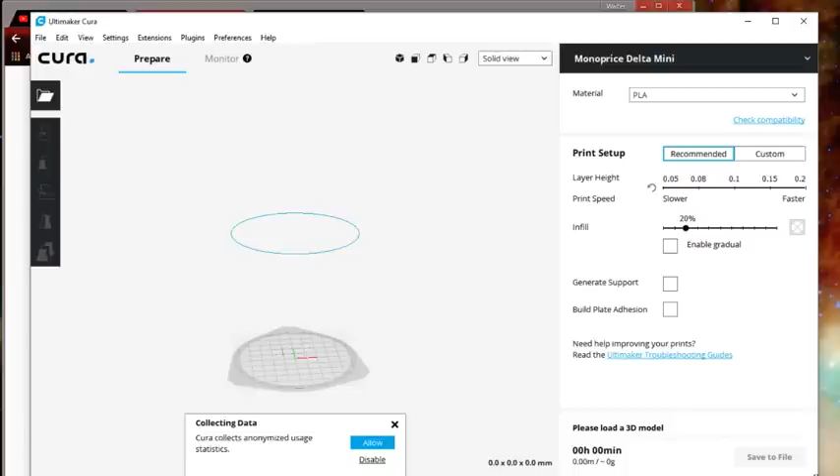Now I've already got the printer added, but I will show you how to add it. When you load their profiles or settings, you can go to settings, go to printer, add a printer, and then under other, for this printer, you would go down and select the Monoprice Delta Mini. It is not there when you first install Cura. The Select Mini and the Select Mini version 2 are both there. Only the Delta Mini is added for this list.

Alright, so now this is on their stock standard, what is this, 0.15 I think. So if I go to settings and custom, oh, it's got a 0.2 layer height. Hold on, let's choose the setting here.

Profile, fine 0.1. Alright, so if I hit that, and I discard everything else. Okay, so now we are on the Fine 0.1 profile. This is their stock profile.

Yeah, I know. You can see where it says Kuntry 3D? If you see something like that, or something you think I might want to see, tell me. Something I might want to read, or somebody's saying something to me, let me know. Because I'm paying attention to this, not that. Oh, you're doing the chat.

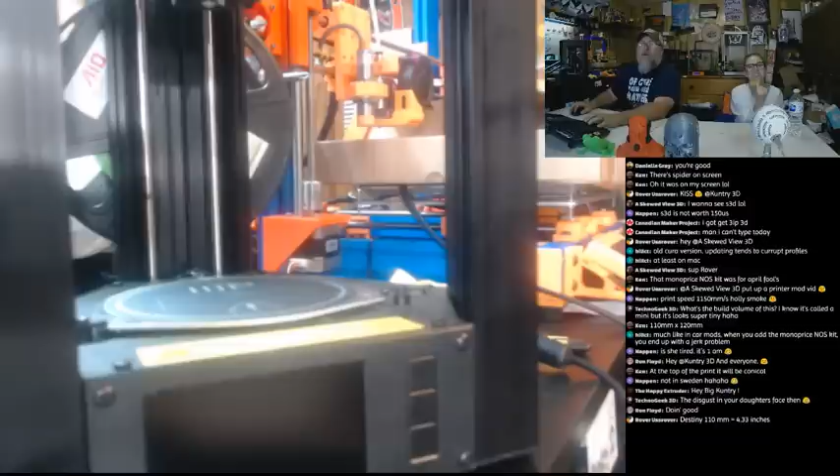So what we're going to do is I'm going to pop back into Cura, go to all. Oh no, that's not it, cancel, hold on. That probably did it right there. I don't have a clue, I can't tell what's going on here. Nope, that didn't do it. That's the wrong camera, why don't we do the right one? There it is, alright, I just got to remember what letter I used.

No fair, she has it. Not only that, it's a Krispy Kreme donut, I have a whole box of them. Pick it up, show them. We have enough to share, you want one, Mad Mike? We don't, I've eaten like a whole box. Oh let me see, all we got is chocolate, some chocolate left. These were from yesterday morning. I don't know, y'all can't see those. Hold on, I was so confused, I was like, they can see us right now. There you go, that's what's left of 2 dozen I bought yesterday morning. So yeah.

Uh-oh, alright, there we go. Okay.

Alright, Nappen, no, what you should do is see if the G code on file has a G92 command that lowers the bed height. Lowers the bed height, see, I don't know, I'm new to this as well. I'm glad some of y'all are here because we can look at it and see. But in order to do that, I need to take this little card out of this printer. What?

Okay, well, I agree. Yes, I do like Pepsi Cola, that's exactly right, I do. I thought it said peninsula. Penicillin? Peninsula, peninsula, okay. No, first it said Pensacola.

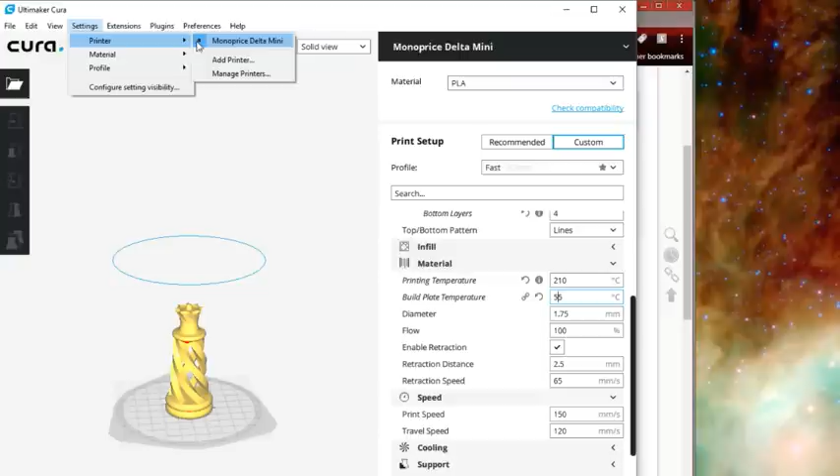Go to settings in Cura. So go to settings, printer. Or manage printers maybe? Or the profile. If I go here, I go to machine settings. Oh, you can set it here. I see, I see, so you don't have to do it in each file, you can do it here.

Yeah, I'm here, and there's a 20 or 30 second delay in chat, so I have to sit here and wait. I'm not trying to be silent, I'm waiting for the chat to pop up once you hear what I'm saying. Right now the Z is at 0.3, so if I wanted a little higher, I would go to 0.4 or 0.5, correct? And I got to wait for you to answer, which is going to take 10 or 15, 20 seconds.

Yes. It's ticking and not doing anything. That's annoying. It's actually close to right. That says 707 and it's 704 or whatever. Why is it ticking? There's no little hand. No, there's not. But the big hand moves every time it ticks. Okay.

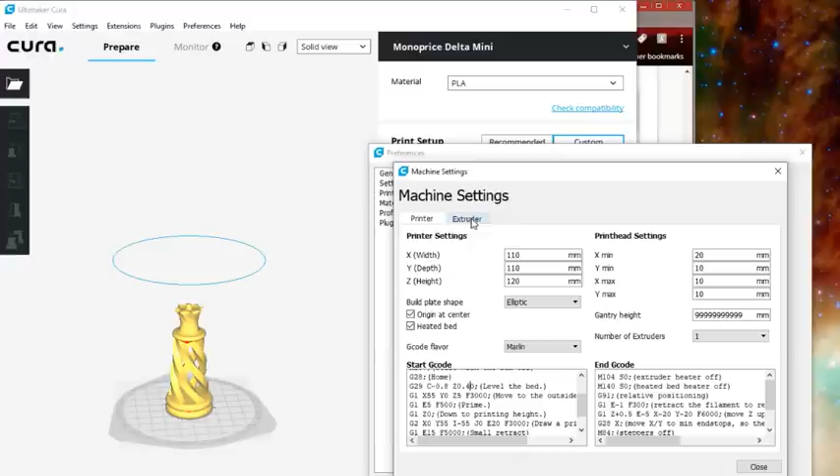Test 0.4 first. Okay, I'll do that then. Let's test 0.4, so let's put 0.4 on here. And we will save that. Alright, so we're good, and we hit close. So I don't have to touch that.

So now let's go down here to build plate adhesion. We have a skirt. And then we can go in here and say skirt line count and skirt distance. That's two things that I change in some others. So I want a skirt line count, and I want to extrude some filament, so I'm going to leave it at 4, and I'm going to make the distance at 4 millimeters as well.

That looks good to me. So we can actually save it to the removable drive. It's saving. It said it's saved. So I'm going to close this, and we're going to go over and rename it.

Rename. Oh, here, just double click. Let's go to the F drive.

I have also found that it likes the .g. Yeah, I left the infill at 20%. I'm just going to leave that, that's fine. I could set the layer height to 0.3, but I think I'm going to stick with 0.2 for right now, because we are just trying to make it as fast as possible. So I'm going to eject.

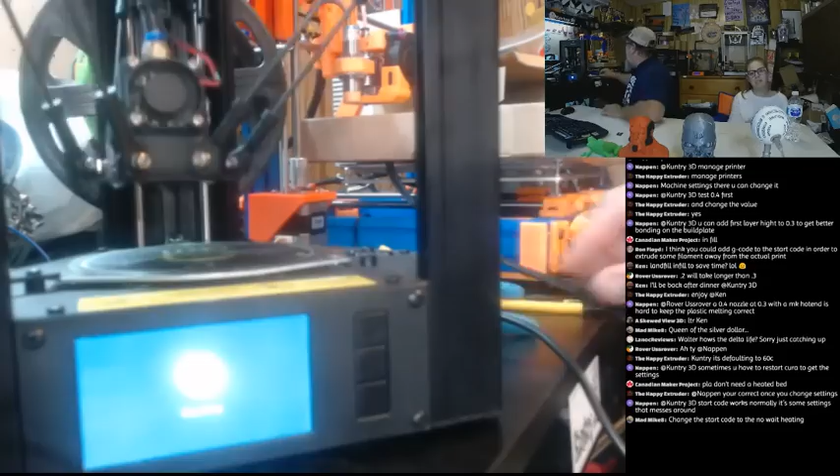Okay, Nappen, I appreciate that. But I will say that here, let's do this, let's cancel this print. And I know we just started it. Let's cancel this print and let's go in and change those settings and get the new ones to adhere to what we want them to be. But yeah, when I look at this, whoo, it is stuck to the bed. That is for sure.

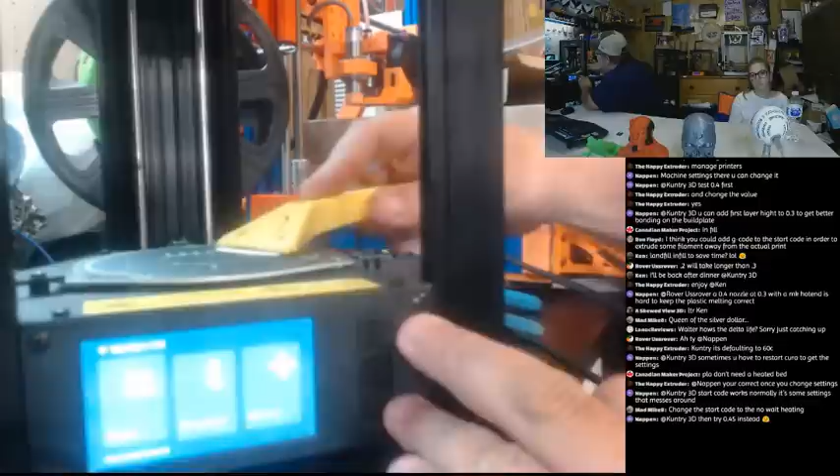All right, I'll have to get out my other little razor blade over here to clean that off. This has some type of build tack surface on it, and it does stick. There's no ifs, ands, or buts about it. It sticks to it. But let's go back to the front here.

Let's see, this is a little too squished. I mean, it is flattened out. That is the first layer of the actual piece, and I see a couple other issues. I see some stringing going on there, so we need to look at the retraction too.

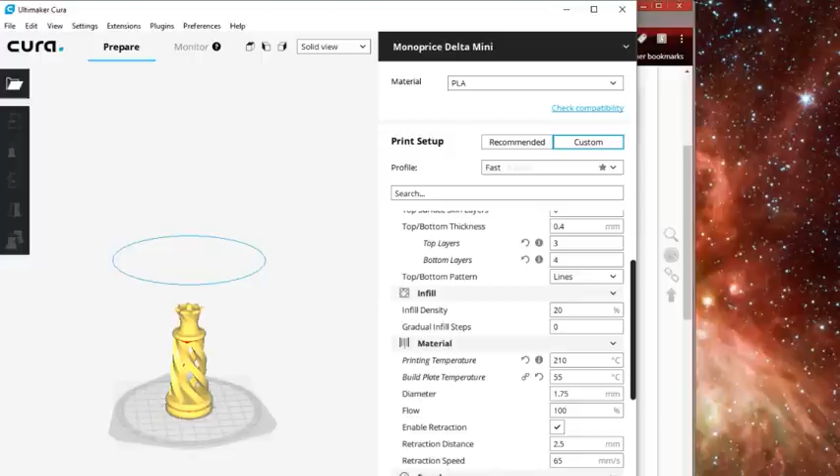So let me get in Cura over here. Let me minimize the screen. Let me get in Cura. All right, so now we go to Alt. Where do I want to go? I want to go to Alt S. Yeah, that's the one I want. Alt S. Okay, so we did that. Now we need to look at retraction.

That would be on the quality, maybe. Let's see. Oh, you think a 0.45? Go up by 0.05? All right, so... that's fine.

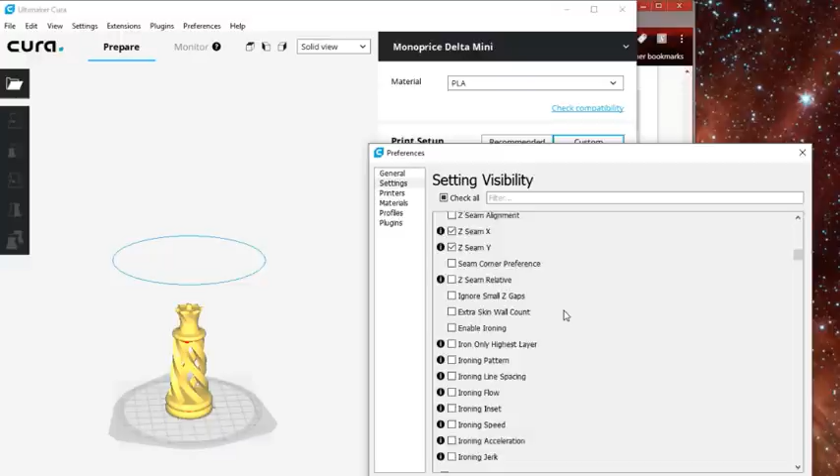Under material? Yeah, there we go. Enable retraction, retraction distance, retraction speed. Okay, so under material, right here we have a retraction distance of 2.5. I'm actually going to change that to 3. This Bowden is something I'm used to, and I know that 3 is a good starting point for the Bowden stuff.

Oh yeah, I forgot to tell you all these things. Yeah, okay. Yeah, I'm not used to Cura, I'm used to the Slic3r. I use that more often than this.

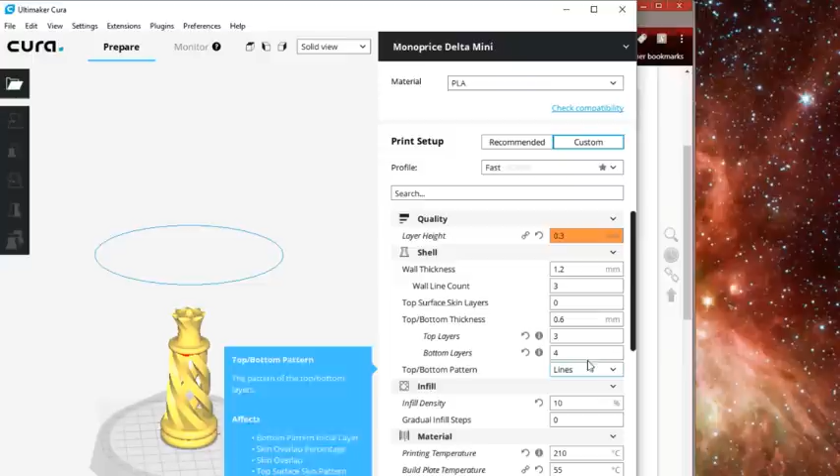So Rover's wanted to do a faster print, so let's go to 0.3. I don't know why it's showing me that, but let's go to the infill, and let's make this 10% infill, and that'll work. Wall thickness.

Alright, what is the problem with this? I don't know, that looks good. Alright, so now, question. You said, or y'all said, lower the retraction speed 25 to 35 millimeters per second, MK10 gear slip easy on fast retract. Okay, let's see.

Material, let's do this, let's make it 35. Oh, not 3,565. Alright, so there we go. Alright, so we've got all that. Cooling.

There is a cooling fan. Hey Riller, what's up, red light? Glad you could join us, appreciate you coming. We're trying to figure out, I'm trying to figure it out. We got a couple of experts in the chat that are helping me out with the Monoprice Mini Delta setup. And no, you don't have to be an expert on everything. There's somebody out there that knows more than you.

All right, so now how do I do this? So let's do this, let's say settings, profile, create profile from current settings. And we're going to call this Mini Delta Coarse.

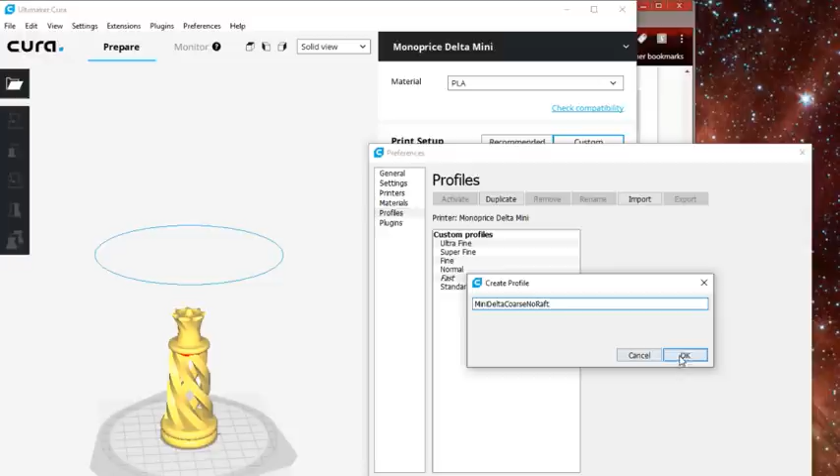Yeah, we have an echo. No raft, I know, I'm just making stuff up here. What'd you say? Oh, it means I have an echo. Alright, so there we go. Is it okay? Yeah, there is an echo. Reller? It might just be you. No, I'm just kidding, I don't know if anybody else hears it. Y'all let Reller know, would there be like extra echoes? That probably would, it'd be like a really big reverb chamber, wouldn't it?

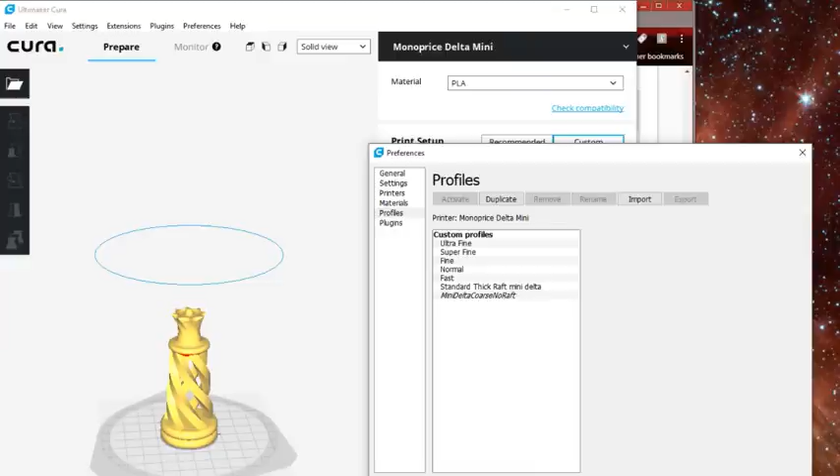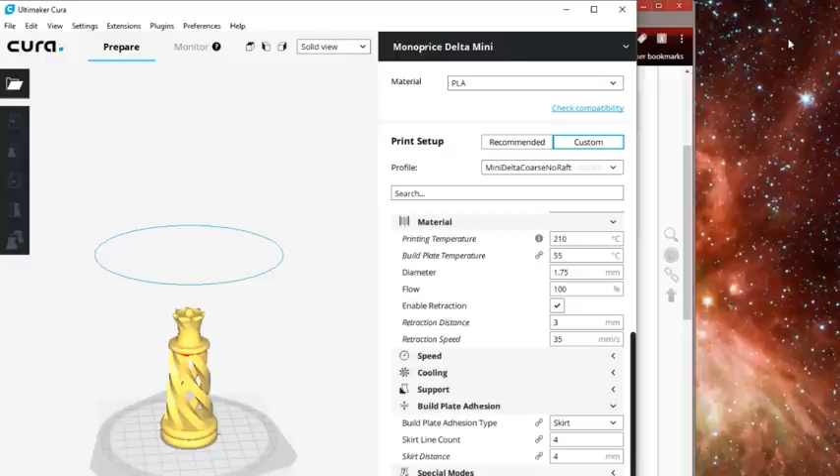Okay, so now I saved this to... what's up Ron, Uncle Ron? Alright, so I saved this to a profile. So now if I close Cura and come back in, you're saying that it should maintain that. So let's try it. Let's click that, go down here, hit Cura, and load it up.

I'm going to take out the micro SD card. Alright, so now my coarse thing is set here. Now I have to go and... oh, not that, cancel. Open, and let's do the Queen, and hit open. There it is, so now we're good there.

Okay, that means that her mic... here, I'll tell you what, let's do this. Well, I'm not talking at this moment. How about I just cut mine off? Can you hear me now? Because I cut my mic off. I'll take it off since we're using the snowball up here. I'm going to need to get another thing here, and I don't know if you can see me. I'm another lavalier mic, so... Oh, wow.

Okay, oh yeah, was going to boost the G29 to 0.45. So settings, printer, manage printers, machine settings, let's go right here. And we're going to move this to 0.45. And we're going to hit close and close. Alright, so now we're going to plug in the SD card.

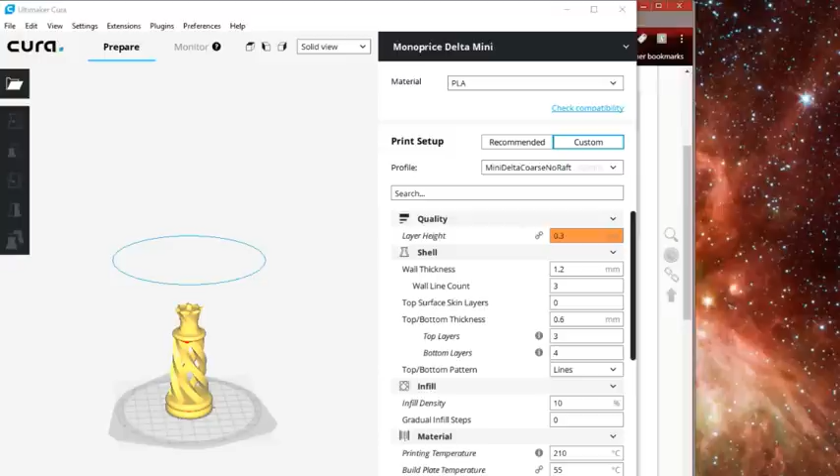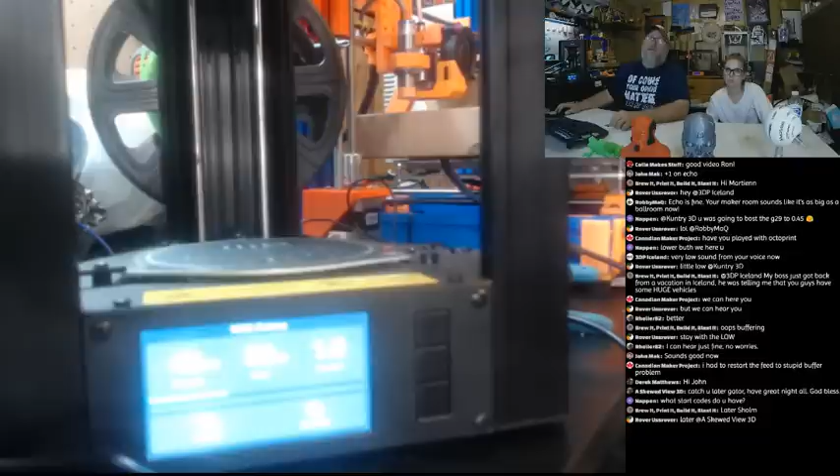Manage printers, machine settings. I have nothing with temperature in there, nothing at all. So I don't know what else it could be. The M104 start code, let me see. I do not have an M104 in my start code.

I guess Canadian Maker, it could be. Alright, well it's decided it wants to start the print, so let's see how we go.

You know, it's funny because I get this weird circle on my code that it didn't have before. It goes all the way around the outside of the bed and then comes in and starts its thing. Alright, so let's see how we do on here. So it's doing a brim, wait, it thinks it's doing a brim.

I showed them on the screen, and if I go to Alt S, you can see right here, I hope y'all can see this. The build plate temperature initial layer is 60 degrees, and the initial printing temperature is 200. What I set was 210 and 55. So yes, you are correct.

That is working exactly as it should then. So no complaints then, it's doing what it should. Well, I have to say the first layer went down fantastic. So we're going to let it run.

It's crooked, it looks like the build plate's not level, even though it does this little leveling thing. I don't know how you would level the build plate on here. Anybody got any ideas on that? Because it's basically on springs, and then it has 3 little clips around the corners, because it's a triangular shape with a round build area.

The PLA I'm using on this, what's the name of that? I've got the box over it. It's not new matter. What is the name of that? This is the AIO Robotics, right here. This is their real green, I think is what it is. What's the name of it? Let me see, bright green. That's it, AIO Bright Green. So it's AIO filament.

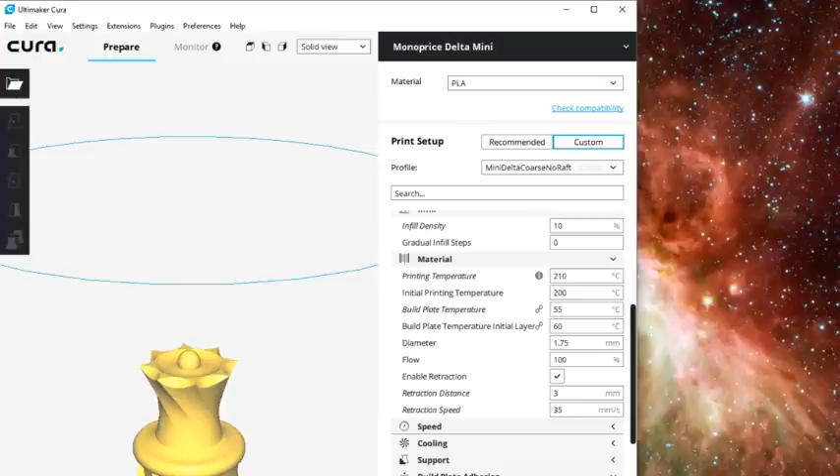So am I back on the screen? Yeah, I am. So let's go to Control F. Oh, come on, really? That should have done it. There we go. So, the only thing I've printed with it is this frog, and cats all day, the other day.

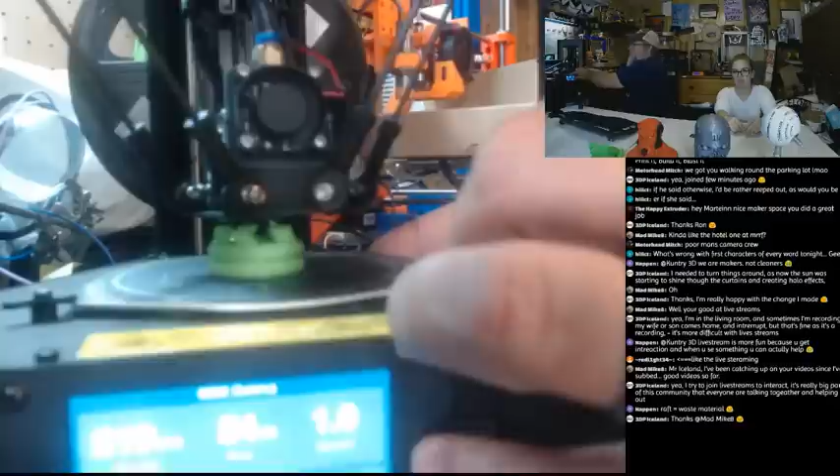Let me slide it forward. I don't know if that's any better. What is it? What, is it that castle thing? It's a queen, a chess piece. It's focusing on the top of it. Well, with the effector and the hot end moving, it's gonna go in and out of focus. But as long as they can see it, I'm happy.

So anyway, I don't know how many times I'm gonna invite my daughter to be on the stream, because I don't like that microphone. I'm having to yell to get it loud enough so you can hear me. Then put it there. Put it where? There. Why? Then they can't hear you. Am I talking? Are you? No. Why not? Are you just trying to get more words? Trying to get you talking. What am I supposed to talk? Hey.

I dropped stuff. How did you like the Maker Fair this weekend? It was fun. Only thing I liked was the anatomy part, but that wasn't even part of the Maker's Fair. That was just part of the Science and History Museum, right? Yeah, that's what I figured. I like anatomy. Hey, Sean.

Good deal, I can hear you. Well, my daughter said the only thing she liked in the Maker's Fair was the anatomy part of the Science Museum. It was a small section. It was, you like... suck. You didn't even like your Daddy and Ron's exhibit. I wasn't there.

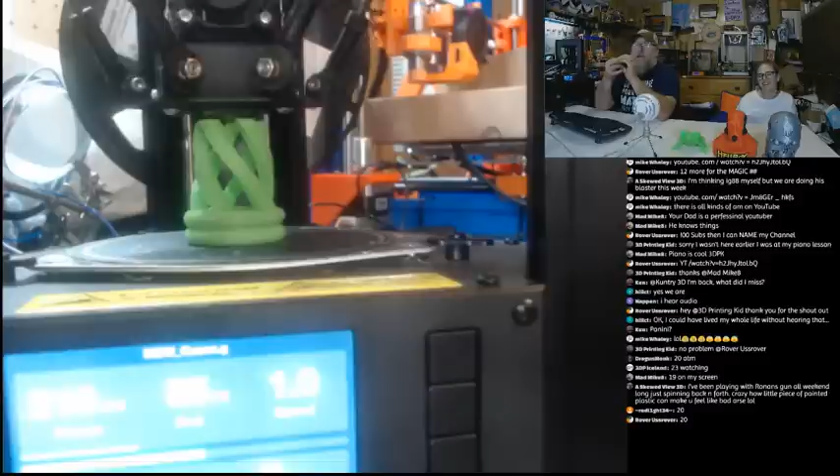Let me pull this down, you can see about how far it is done there. 20 at the moment. Alright, 23 watching 3DP Iceland. I think YouTube just lies. And 19 on Mad Mike's screen. So somewhere around 19 to 23 people are watching the video. YouTube can't make up its mind. Oh well, we're getting a bunch of 20s here, so there we go. Now we're steadying out at 20. Alright, we hit a plateau.

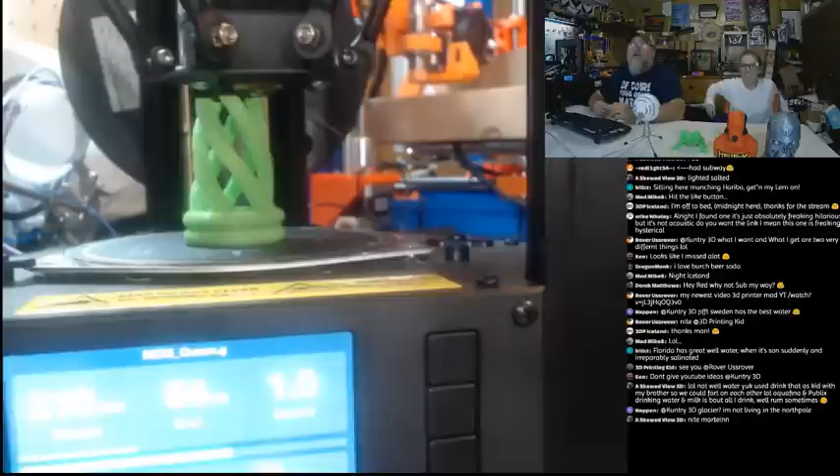Not 1,000. Hey Sean, the problem with that is we have great well water where I live at, and drinking out of a plastic bottle is probably the worst thing you could do for the environment. Stop buying them, buy a container. Actually I hate, you have water bottles, there's 50 million water bottles in there, like the stainless steel ones even. I hate that taste though, because it gets like the steel taste, or like the iron, whatever taste, it makes it taste funky.

I am Uncle Ron, 2,000 years old, look at this, and I started growing my beard when I was 1. That's all I got. When you were 1?

I ain't shaved since I was 1. You literally shaved like a couple months ago. No, it's been about 8, I think. Really? Yeah, well that's a couple. Like couples too, hey Mad Mike, that's exactly right.

I do not, however, when I am not on camera, dag nabbit? No, I talk like a sailor. Beep beep beep beep beep beep. So yeah, no.

How are we coming? Hey man, this thing is actually printing freaking good, that's all I got to say about that. It's literally right there, why do you have to look there? Because that actually makes it look worse than what it looks in person. Well, I can't see it, there's a humongous bar in the way. And the print is coming along really good.

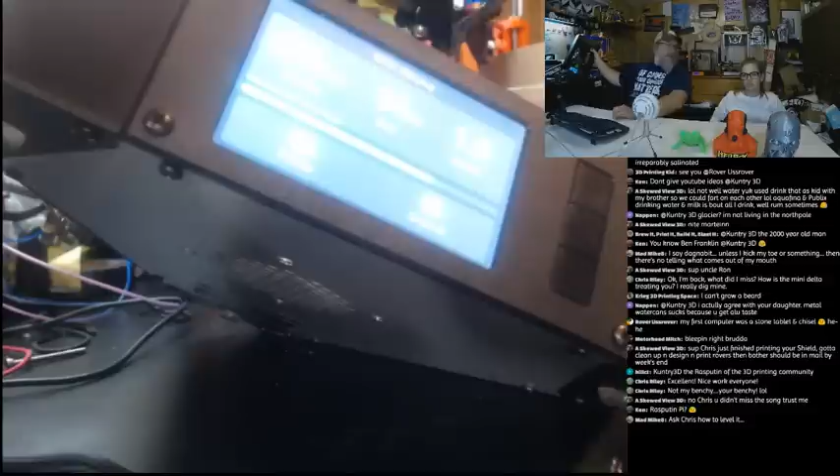Ask Chris how to level it. You can level it like this. That's more level if I do it that way. Isn't that level? I don't know. Is that the level bar? I don't know what that is.

I was gonna ask you a question, but I forgot. Chris Riley, have you ever heard the song Whippin' Nay Nay? That was the question I asked everybody. So we need to know if you've heard that song, cause you're in your 30s, what, 36 or 37, somewhere in there, is what you said.

Ew, why does it do that? Is that paint? What paint? Yeah, because he's dirty. That's covering up holes, dirty.

Tram is the correct word. You're right, Ken, you're absolutely right. That is the correct word.

That little booger goes fast. What's that? The thing goes fast. This one? Yeah, it can print twice or 3 times as much as these.

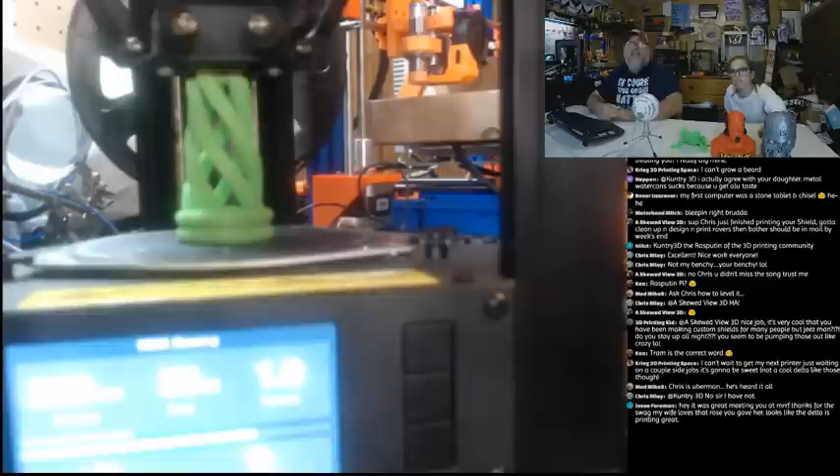Anyway, Chris, look up the song first and listen to it, and then listen to the acoustic covers and see if there was any reason for anybody to cover that.

Hey Jesse Foreman, it was nice meeting you too. I don't know what you look like, so I don't know which person you are that I met. And I gave out several roses at MRRF, and I'm glad your wife loves it. I really am, that's awesome to me. And if it gets to where you can get a 3D printer, or if you already have one, you can print your wife a rose too.

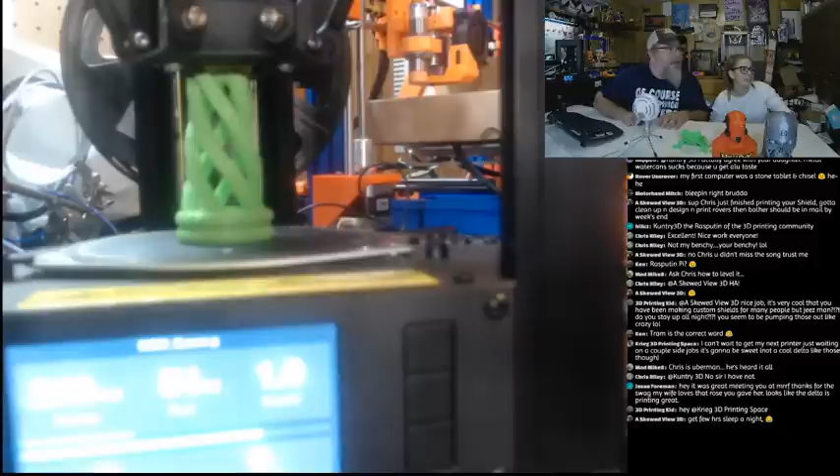Oh never mind, my wife went and found the Whippin' Nay Nay acoustic version that we heard yesterday. Actually, give me the chance. It's by Tyler Ward and Two Worlds, I think. Yeah, it's a Tyler Ward and Two Worlds cover, I think. Yeah, so that's most definitely a parody. Anyway, go listen to it.

Give me a raw potato. People like me, Ken, I don't know, man.

Y'all see what? You see what I got to put up with? We're doing a live stream here, you do know that, right? Okay, hopefully YouTube. Wipe off the microphone. I sneezed in my crotch.

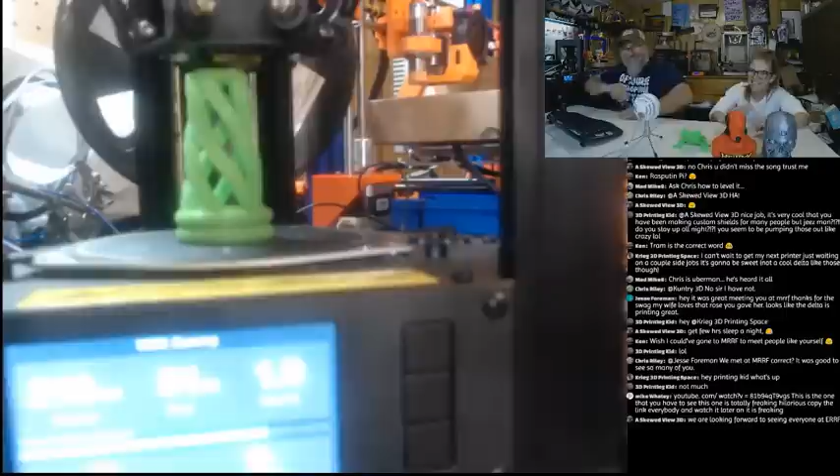But anyway Jesse, if you got you a printer, I mean yeah, for the price that you'd have to pay for this printer, I really have nothing bad to say about it so far. It's loud, but even that's not bad.

Now she's eating a raw potato. It's hot back here. Oh, thank you for saying God bless you. Yeah, kill that hamster. What hamster?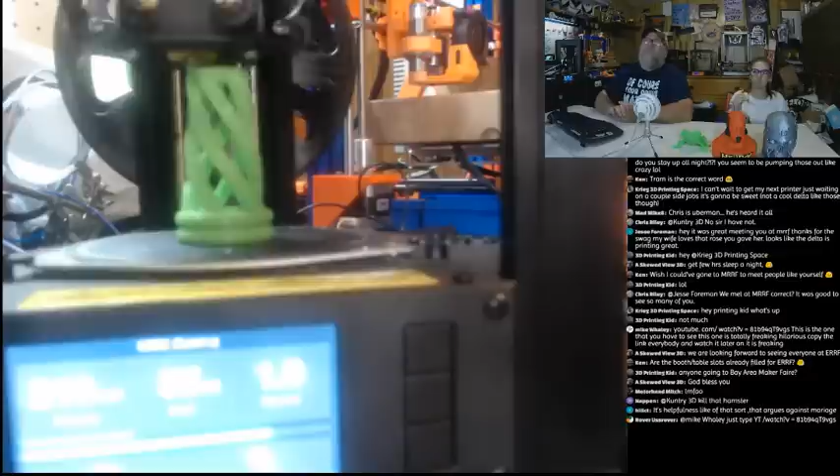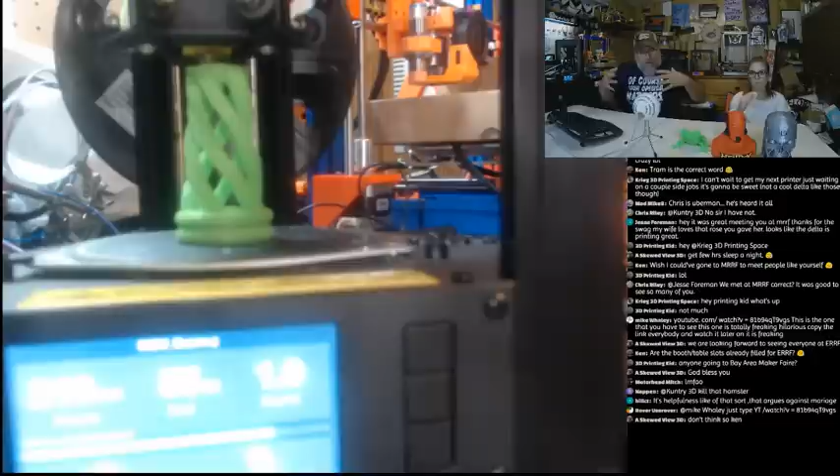I'm with Chris Riley. I met so many people at Murph, and even at the Jacksonville Makers Fair, I gave out bunches of roses, dude. And I can tell you some more stories. I wish Ron was still here, the Happy Extruder. I gave one to a big gentleman, big muscle bound man. He was looking at a big bust I had, stretched out, and it was pretty tall, probably about yay tall. If you know how big the snowball here is, you can kind of see - it was probably 10 inches to a foot tall, the bust of Groot, and he picked it up.

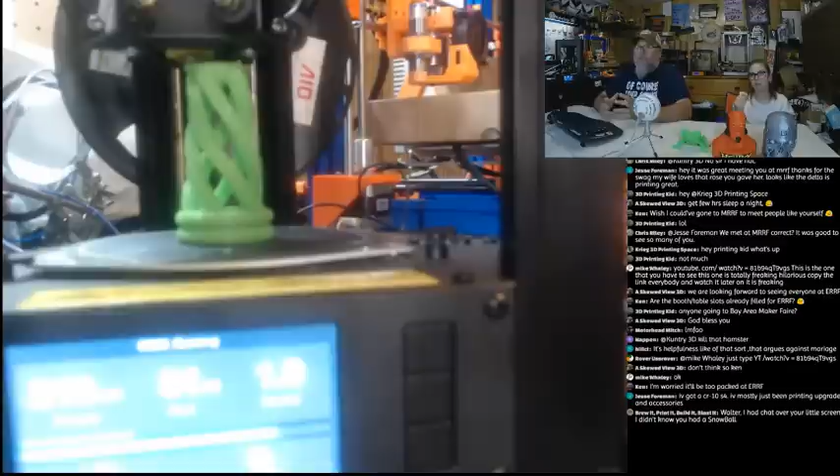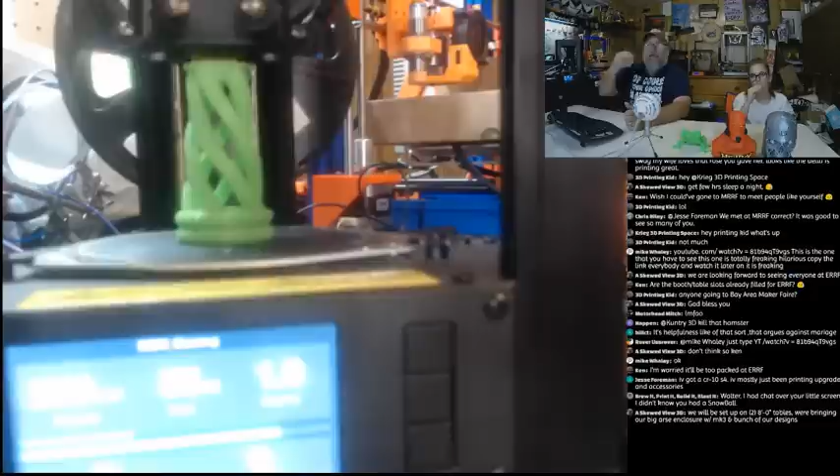I hear you, Jesse. But he picked it up, man, and he was just admiring this print because it was really good, and it did come off of the printer. But he was looking at it, and he looked at me and goes, 'How much will you take for that?' And I said, 'It's not for sale.' And it looked like it broke his heart, which was awesome to me because I could see that he enjoyed that piece. So I said, 'But you can have it.' I think that made his day. I really do. And I had another lady hug me when I gave something to her son.

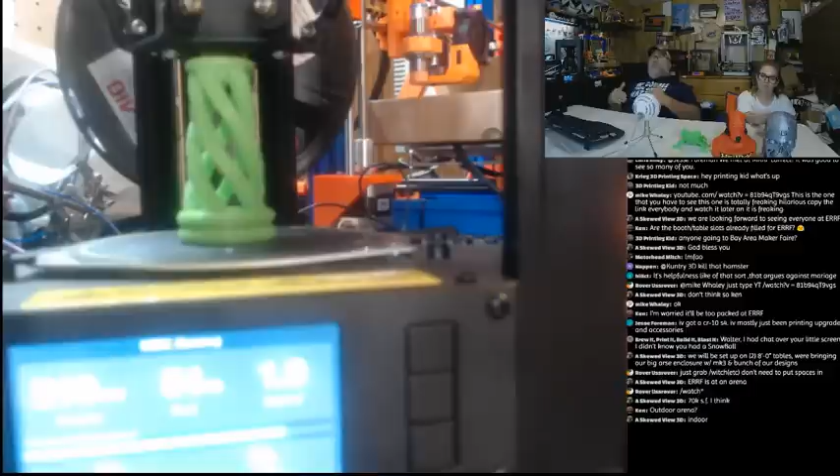It was one of the marble chases that I'd printed. It's been sitting here in my house for 6 months. I printed it and used absolutely zero marbles in it, so I hadn't done anything with it. So I gave it to him. That's what makes my day - when I can hand something to somebody and you can see on their face the enjoyment of that thing.

So that's why I love to go to Murph. I'm gonna love going to Earth. I loved going to... why do they have such weird names? Murph, Earth... Murph is Midwest RepRap Festival, Earth is East Coast RepRap Festival. And we're trying to figure out whether or not we're going to do the Surf one, the Southeast RepRap Festival. And Glenn, Fun King 3D, if he's on here listening - hey, Kuntry, back.

Yeah, and that's Ron. That's what I was talking about - those looks when you hand something to somebody and they're like, 'Oh my God, are you really giving it to me?'

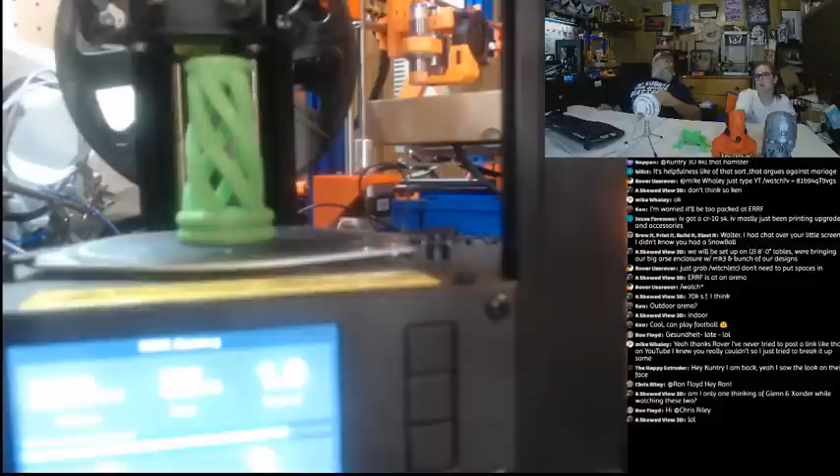Are you only thinking of Glenn and Xander when you watch these two? He's saying you're Xander. What? And you hadn't met Xander yet, or Glenn either. She's not met them yet. She will meet them in June when we go to Earth. There you go, Surf and Turf. That's good, that makes no sense. You used the wrong... what's it called?

Yeah, I know Ron, and that's the thing - it's like you're giving it to me, why are you giving it to me? And it's just for the sheer enjoyment on their face. Even my wife was like, 'You liked that Groot, why did you give it away?' I said, 'Because he liked it more.' And he did, he liked it more than I did. And not only that, I can print another one - I don't have to do without.

Trying to set up a Barf in Oklahoma. They actually have one. Somebody said that they have one of those already, the Barf one. You should just print like a buttload of things to just give away.

Yes, this is 3D Solutech - what is that, Real Silver? Hold on, I'll tell you the exact name because I don't know exactly. It's either the Real Silver or just Silver. Gotta find it first. I know I got some left, at least I did have. There it is. Okay, alright, let me sit back down now. It is the 3D Solutech Silver Metal. So that is their flavor of silver metal, the 3D Solutech silver metal, and it actually does look pretty good.

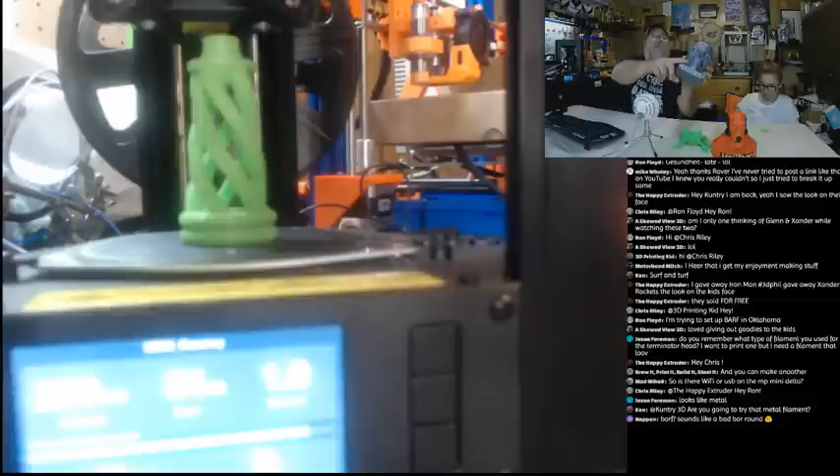Now I will say, these little supports here, these little hydraulic cylinders on his face - it even says so on the model on Thingiverse, I don't know what it is, sooner or later I will figure it out. Anyway, the little hydraulic things on his face - I tried to print this first, actually did print it first, in Slicer Slic3r, and those supports were garbage. So I went back and looked, and the man who made the model said Cura was the only slicer that would handle the way the model was done. So you could probably do some tweaking to the STL file to get it to print, but on this one he said Cura sliced it fine to begin with, and it does.

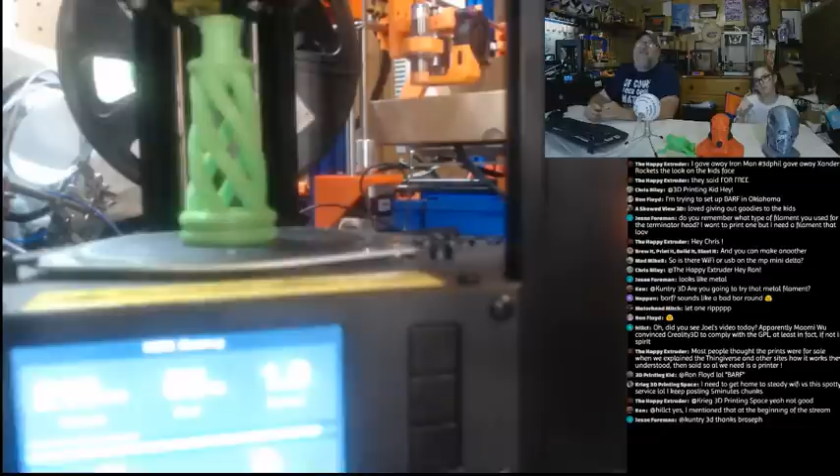Hey, anytime, Jesse. I don't know where you are, if you're going to any more 3D festivals or whatever, but I'm going to try to make as many as life allows, you know.

Yeah, napping, that's the way to do it, buddy. I'm one of those, I leave my printers running. When I printed the frame for the printed printer, it took 5 days, and that was on an ANET A8. So I did a 5-day print on an ANET A8, 112 hours.

Well, Ken, the problem is that when Creality's own people said that they're going to tighten it down even further, I don't think so. I don't think there was an overreaction. I think that the community responded how the community should respond, and Creality came back and responded how they should respond. I don't think that the folks at Creality understood the deep-rooted love for the GPL licensing that we have.

Oh, I hear you napping. Yeah, if it's a freshly built one, you know, it's got to be burnt in to know that it's not going to catch on fire and stuff.

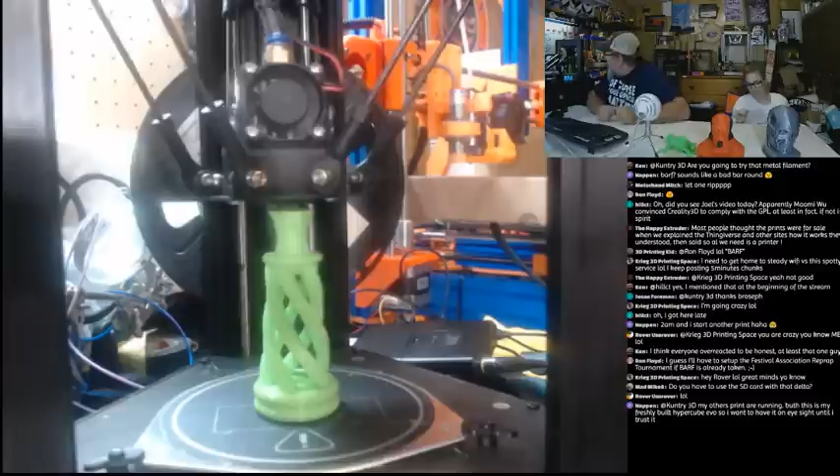We're almost there, gentlemen, and we will get to see what type of print quality we have and what kind of things you can tell me to make it better. Chris Riley should be really good at dialing in Delta printers right now, because I think that Geeetech whipped his butt, is what I think. He did get it to print, and I am getting a benchy out of it, though.

Thanks, Ron. You know, all I did was print cats the other day, and you saw that. It was because I didn't have any time to set it up. And y'all helped me out, y'all helped me set it up correctly here, which is something I didn't want to do at the Maker Faire. I didn't know what the turnout for the Makers Fair was going to be. So it turned out it was a great turnout. I mean, there was a bunch of people there, lots and lots of people.

I think you should make things prior to the fair next time, so you can just hand them out. I had a lot, I know, but you had like roses and stuff. But I had whistles and maker coins and all that. Yeah, I gave all those out early.

My goodness, to China? Good, Ken. I thought he was being serious. I was like, you're going to China? I hear you, Chris Riley, I get it buddy, you're very seasoned at the moment, not in a good way.

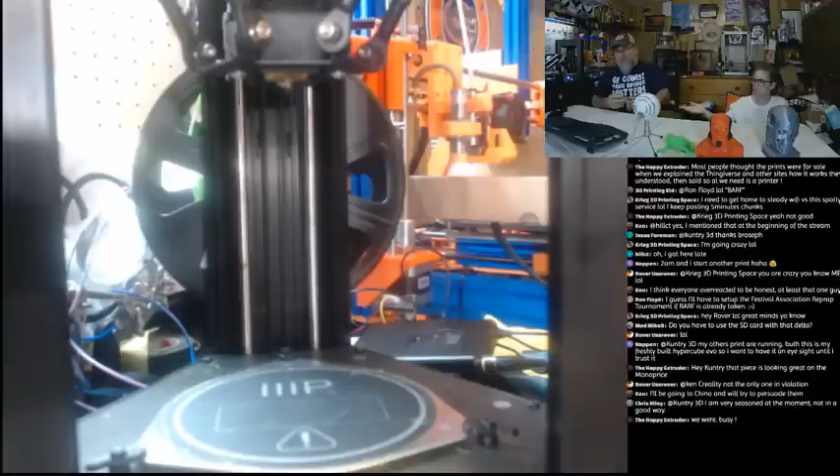I hear you. Alright, so we have a model printed, we have a print on the build plate. And I will tell you, just from me looking right now, this is at... what we do this at 0.3, I think. So this is not as good as it could be, because the cat, I believe, is at 0.1. And I could probably do with a little bit more retraction, or maybe slowing the speeds down a little bit.

Was it, Ron? I did not know that was their first Maker Faire. That is awesome that we were part of their first one.

All right, so y'all watch it, if you get motion sick, because I'm fixing to pull this camera down, and we're going to see if I can get this focus in here. There we go, the quality of this is not super bad.

Y'all take a look, tell me what you think. You are really putting it close to the camera. Is it focused? It's focused, sort of. See a little bit of stringing in there. Let me move it up some so you can see the bottom.

But yeah, I think that's a pretty good print. I mean, you got to remember, it's a $150 printer. So, did some bridging across here. And it's using my non-existent fingernail to pull across here. It's stuck pretty good even. I have a fingernail, all right.

Okay, so my daughter wants to hold it for a minute. So let's go back to the front camera here.

So y'all tell me what you thought of that print, because to me, it turned out really good. Much, like I said, not as good as the cat, so I'm sure there's some things that we can tweak. I am getting, let me go back to the overhead here, I am getting underneath here. Let me see if I can get this to focus.

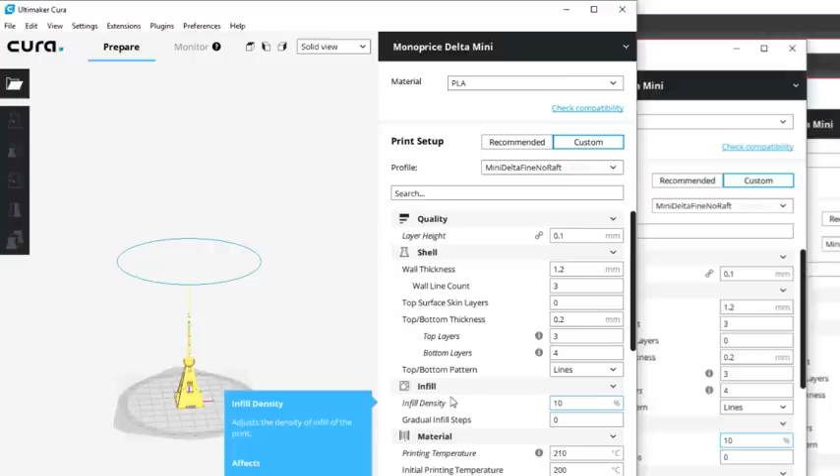Let's take out the SD card over here. And I might have to take a... my card reader went away. There it is. Alright, so let's stick this in the computer.

Alright, so go to Control F. Go back to the front here.

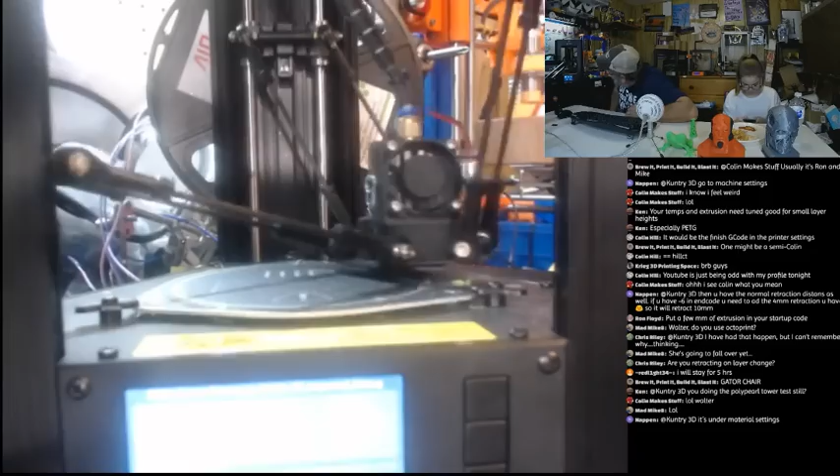Alright, so it's sitting there. It created the globs on the table like it always does, so there's filament at the nozzle. Now it's going to go around. I really don't want that in there, so now it's doing the skirt. Actually seeing a little plastic on the skirt, not near enough though. Really not near enough on the skirt to get the nozzle primed.

Chris Riley, let me look. Cura is my third language. I got you, brother.

Add Z-hop only over printed parts should be active. Okay, let's see. Everything is hidden in Cura. I know, where the hell is Z-hop at on here? But they do have a ton of settings in here. Z-hop over only printed part. Okay, there's that. I don't think I'm getting any plastic again.

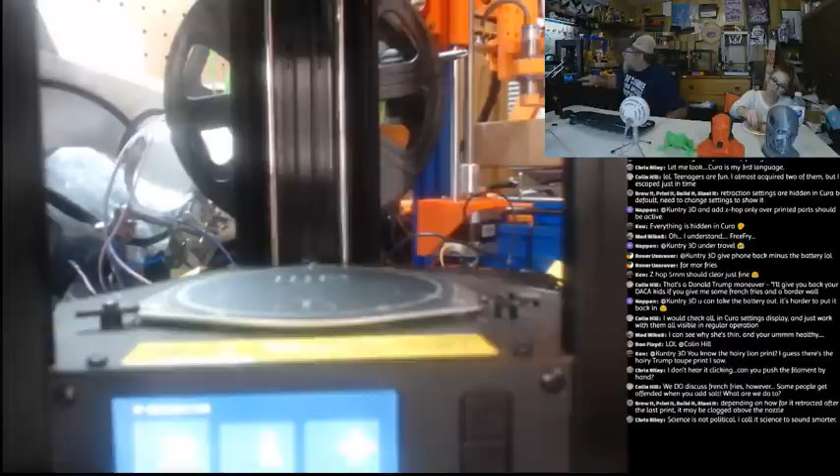That is the glob that I just squirted out when Chris told me to move it by hand. Alright, so let's do it again quick so we don't have to wait 45 minutes for it to warm up again.

Uh-oh, I didn't do that. What the heck?

I'm still healthy for hibernating. There we go, yeah Mike said I'm healthy. So am I, did you see that? He said that's why you're so thin, and I'm healthy. No, I'm thin because I'm a teenager. No, you're a smart ass because you're a teenager. That's also correct, but I'm a smart butt because I'm also in this family.

Ken's got the idea, got to stay healthy for when I need to hibernate. No, not clog.

Do you hear what I said? Ah, you call it science to sound smarter. I hear you, I hear you. You never listen because you're a male. Men do not listen to women.

Alright, see, this time it's heating the hot end and the extruder at the same time.

I don't want you on there. Somebody talking to you. Were you talking to me? Yes, I missed it for the past like 5 minutes. What'd you say? I said I'm only a smart butt because I'm in this family. Well, that's true, you get it honest. True, there are no lies.

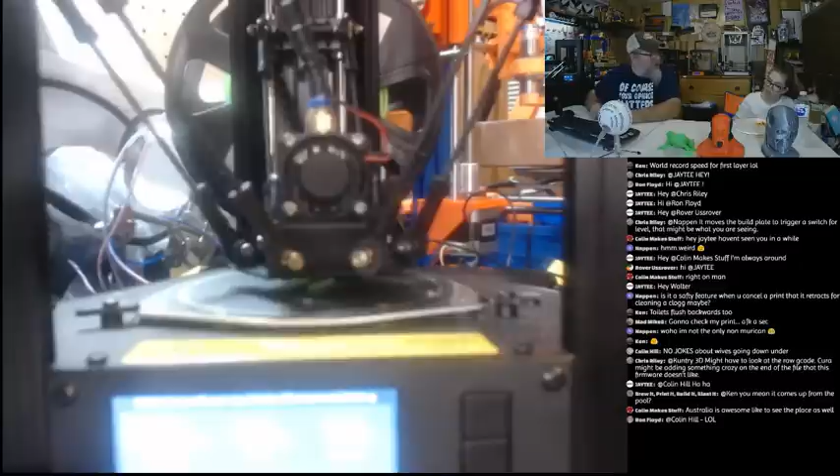I'm gonna get raped. Take a gun. I can't take a gun on an airplane. Pack it in your bag, that way you got it when you get to Australia. They check your bags though. I'm not talking about your carry-on. Well, ship it to yourself in Australia. They probably have something to say about that too. Can you ship guns? You can, but I think Australia's got some pretty hefty laws about guns.

Yeah, I believe so. I believe you'd get arrested. Just for having a gun? Just for having it shipped to you. I don't know, JT may be able to answer that.

You know what, Colin, you're right. I've been around the world and there's stuff to see everywhere. But if you drive this country, you'll never see it all.

Bill Murray would throw a Snickers bar in that bowl. You're right.

Show how big spiders are in Australia, and she will stay at home. JT said don't do that - and I bet he's talking about the gun. Yeah, they're big, we've seen the spiders. I wanted to see those spiders. Those are babies, we live in Florida, we have spiders bigger than that. No, we don't.

You know what I want to have? I want to have coconut crab. I'm pretty sure it just tastes like crab, but you know how big those claws would be?

You know, it's really funny, this thing is building but the feet are really thin, so I probably should do this over again. But I'm gonna let it run, and we know what happened. Ron Floyd loves guns.

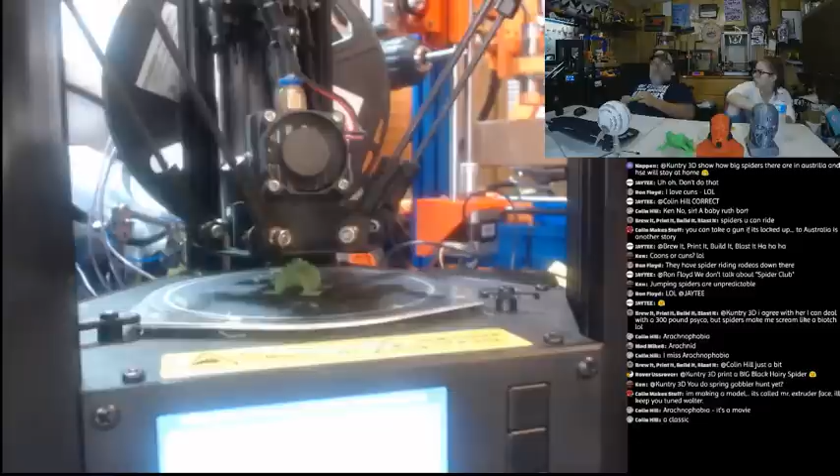It's time, I have not had a chance to, Ken. But anyway, we put it in this cage, and Daddy came home one day, and the wire was knocked over, and the spider wasn't in the cage, and he decided it was time to move back to Florida. And that's no joke, that is a true story. That's the reason Grandpa Jake moved back down here, for a spider.

For a spider, because he didn't know where that spider was at. It was a big spider, a brown tarantula that was like this big around. Why would you catch a spider that big? You live in the wild, you could kill a bird, take you back home. Who does that? No one with a brain. No one's just like, yeah spider, awesome, thanks bud.

Okay Colin, keep me tuned in, buddy. I'll try to print it. I'm gonna try to print some of Sean's stuff.

Is that what it's called? Or is that what, like... Arachnophobia? No, what, psycho spider. What is that, is that the movie? That's a joke, never mind. Psycho was by Alfred Hitchcock. I've never seen Psycho. You should watch it, it's a good classic movie. I don't really like scary movies.

Alright, y'all can see the torture test here is coming along. There's your spider.

What the heck? What is that? That was some extruded filament. So tell us about this redback.

You got bit by Splinter from TMNT? Sure you did, a splinter? No, by Splinter, from TMNT, Teenage Mutant Ninja Turtles. Did you know what TMNT was? Well, I know what Teenage Mutant Ninja Turtles is, I just forgot they called it that. But is that the... what's this?

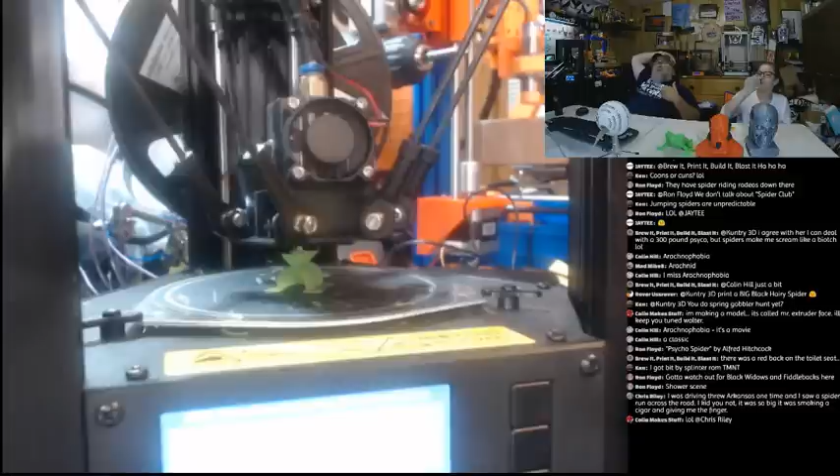Chris Riley, I can see that, buddy. We were on vacation at the Grand Canyon, this has been 6, 7 years ago. I was in third grade. So she was in 3rd grade, so 6 years ago. And we did a drive down to the bottom, we had to go to the Indian reservation.

Quit hitting that table. Oh, I'm hitting it right here. There we go.

We had to go to the Indian reservation and pay because they own the canyon, not just the rim but the actual canyon itself. So you pay to drive to the bottom and you have to have an SUV. We drove down to the Colorado River at the bottom of the Grand Canyon. That's a sight to see, I'll tell you.

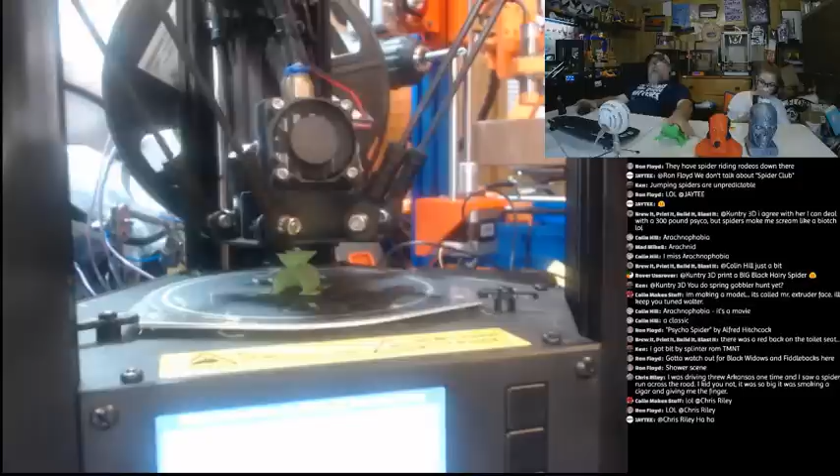On the way back we decided to take Route 66 because it's awesome. It's a historic route, so why not take it? We were driving down Route 66, probably going a little over the speed limit, and I saw this spider. I promise you we were doing probably 70 miles an hour. I saw this spider and stopped, backed up, opened the door, and took pictures of it.

It was the size of a dinner plate, really. I don't remember exactly how big it was, but I remember doing that. It was a good 6 or 7 inches across, leg to leg, that big around. About 6 to 8 inches across. I thought it was a tiny spider. No, you were tiny, okay, that would make it bigger.

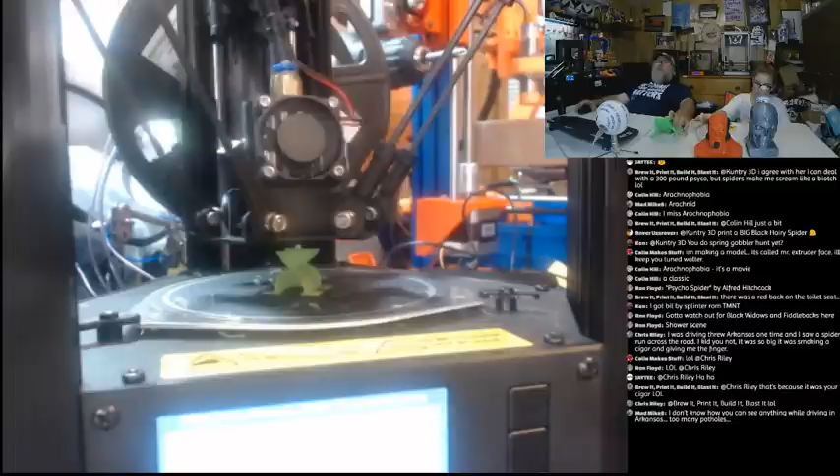Too many potholes, because I'm a pothole. Have you seen that commercial? It's like an insurance commercial with a pothole talking. No? It's really funny, I don't watch TV. I don't either, it's like an old commercial.

Did you mount the spider? No, I didn't kill it. I took a picture of it and let it go. I love spiders, I'm telling you, we have them all in the house.

Came from a land down under... you were then, Colin. I hear you.

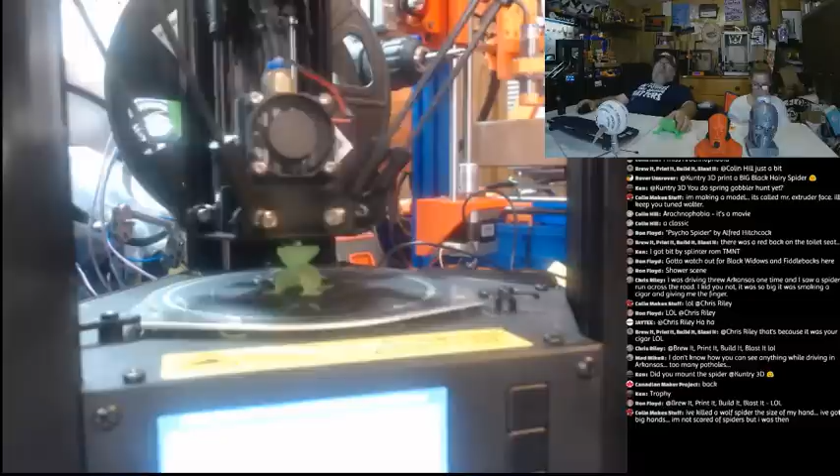Billy Bob Thornton. Horton? Thornton. Oh, you said Horton Hears a Who? Yeah, I thought it was Horton. Here's the who, here's a who. Could be Horton, here's a hole. Because it's an a-hole, Horton here's a who. Oh, it is Horton Hears a Who.

Is that your new mouse? Yeah. It looks like a frog, not a mouse. No, because I'm not left-handed. That's annoying, it's loud too on this microphone.

They can hear everything, there you go again. Tim Hortons, eh? No. Ron M, there's a whole bunch of Rons too, the Rons are catching up with the Collins.

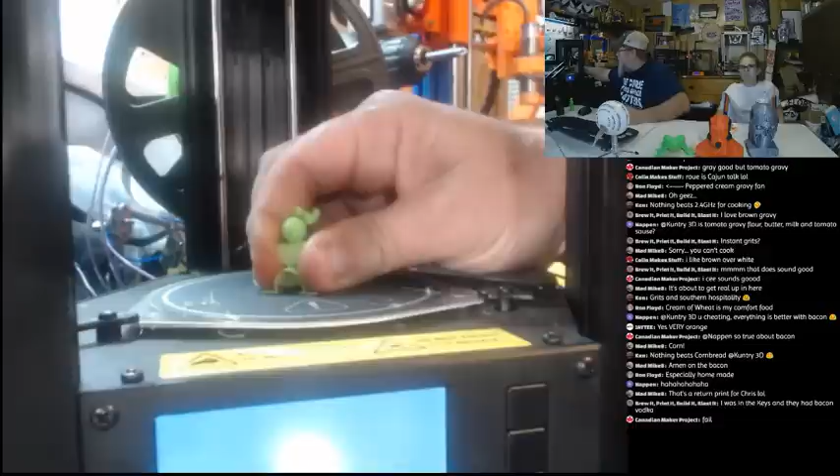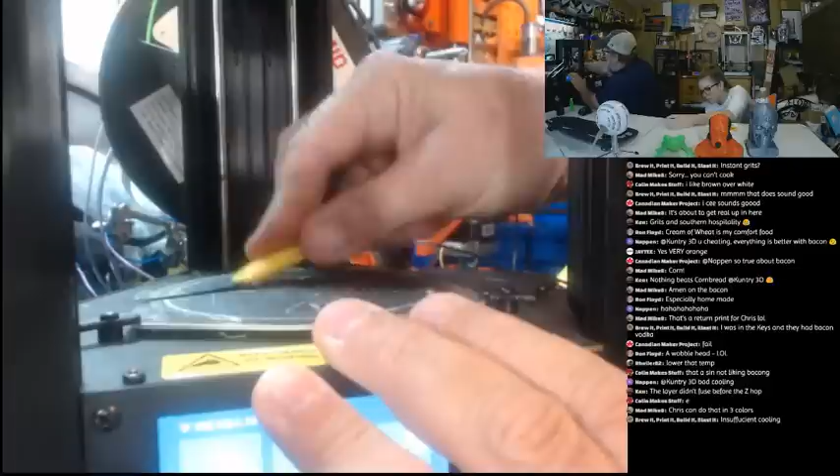Hold on, we'll look at that in a second. I'm gonna try to start this again. I'm gonna let it print, even though I'm not gonna stay on while it prints this time. I'm gonna go ahead and let it print again.

Daddy, it looks like a girl that has a ponytail. Has a what? A ponytail. A funny feel? A ponytail. Oh, a ponytail, looks like a girl with a ponytail. Doesn't it? Oh, it can't see. But it does, look at it.

Hold on, let me start this over again. Alright, so let me see. I'm gonna hold my hand here and see if I can feel it.

Yeah Ron, I did know. Yeah Chris, that's actually my thought too, buddy. Mad Mike, Chris can absolutely do it in 3 colors. He don't know that commercial. Oh, I was thinking Napa Know-How commercial.

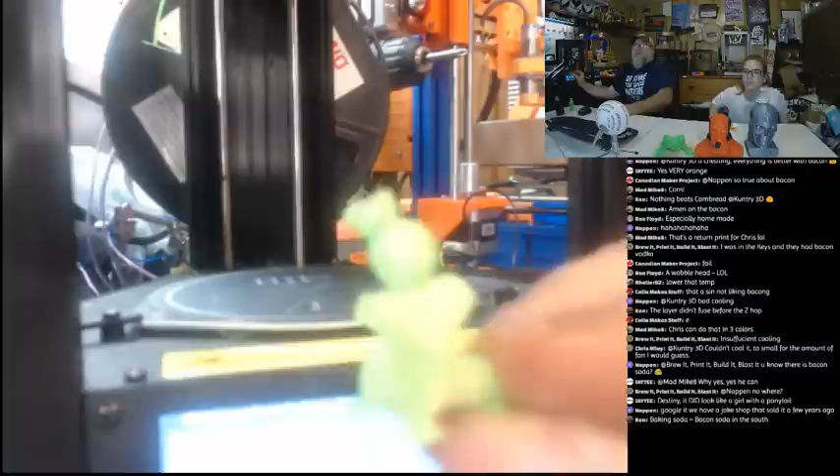And they said, Destiny, it did look like a girl with a ponytail. Well, here, I will show you how it looks like a girl with a ponytail. Come on, zoom in. Focus, not zoom in, focus. So, kind of looks like a girl with a ponytail, doesn't it? From the front, especially. Oh, alright.

Got no retraction. Alright, I just extruded a big old glob out, so we have filament there. Let's see what it does when it gets here. Aha, there it is, I found it. Oh, then it done it again. And then it did it again. What? And again. This thing is pushing the filament out a mile before it starts printing.

And I mean that, it's pushing it all the way out of the extruder. And I think it has a sensor on it. Guys can have ponytails too. Yeah, I know. Oh, good dog. Oh yeah, this thing is absolutely saying I am not gonna move until we get to a certain point.

Yeah, and then it starts. So then I can do this. Yeah, I've got to find out what that code is that's doing that. Alright, so now we're getting some plastic at the beginning where we were not before. And I've got a glob that's dancing around.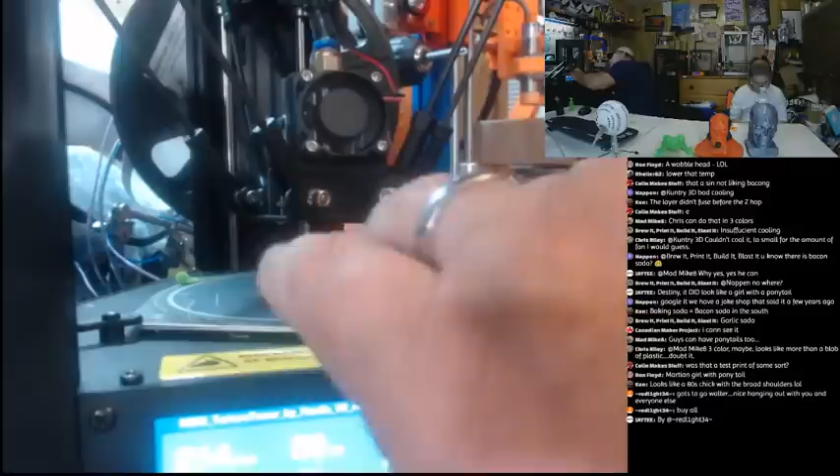I wonder if it'll let me pause this and resume. What does it do on pause? Okay, so maybe I can get rid of that glob right there, and try this, and hit start. Woo! Got a little crack in there.

Bless you. Hey Red Light, take it easy buddy, appreciate it. 80s chicks with the broad shoulders.

Bella said it was interesting. Garlic soda. Thank you, Mad Mike, for saying that. Bella said that it's interesting. Yeah, okay, I said I don't know what's going on, but yeah.

Alright, I'll test Cura on mine too, Walter. Try to figure out what to do. Yeah, because like I said, when it pauses in the front right before it does its circle, it pulls out, and a country mile of filament is pulled out and taken away. So this one probably won't be good at doing the spire on top of it.

Oh wait, hold on. That was for you, Nappen. Absolutely for you. Country mile. That's right, Ken.

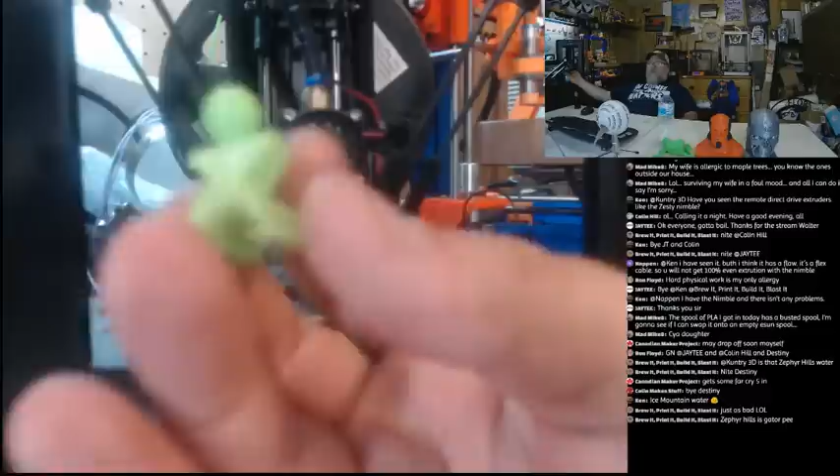Let's see how this is looking. I'll tell you what, I don't know about this. It's doing Z-hop, but the retraction is not working. I don't know if y'all can... here, let me help y'all out. The retraction, you see the retraction? And no, I'm not saying attraction. You see that crap, right?

Nestle water is not from Canada, it's a Canadian maker project. We have Nestle water plants 30 miles from our house that actually pump our spring water here. Nestle has water plants all over everywhere, and that's why there's big uprisings about them not taking water from here. Deer Park has deer urine in it. I'll leave that one to you, Mr. Ken.

Oh boy, yeah, about 30 minutes. Maybe this one won't hang a ponytail on us. If we do, we blame it on Chris Riley and he can have it. I'll mail it to Chris Riley. I'll mail him a cat raft.

Alright, I'm going to switch back to the front for a minute, and we'll look at that one again. Let me put the top screen back on it. Hold on, that way at least y'all can see it. There you go.

Suffolk County City Water in a bottle. Well, that just don't sound good. Purified water enhanced with minerals for taste. Because water's supposed to taste like something.

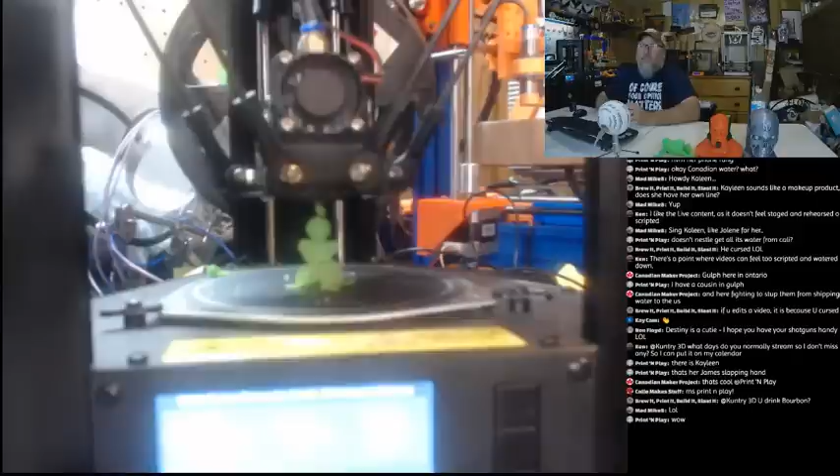All right, here we go again. Yeah, I think the Z-Lift, I think y'all right, I think the Z-Lift is getting it, because it's fixing to knock it off again. Can y'all see that? Let me go back to the top shot here. Yeah, it's done, and it's because that little bitty spire doesn't work.

Wow, just wow. I don't know what you're talking about.

Oh, well that's cool, Ken, at least it put me in the list. I didn't think I was getting listed. That's pretty awesome.

You're right, Colin. I hope one day, Miss Kayleen, that we can actually meet in person. That would be awesome, to meet the lady that can put up with James and keep him in his place, because I know that's got to be a full-time job taking care of him. Make sure to bring Basil, that'll work too.

Hi, Mad Mike, they are. Y'all know me, I ain't gonna hang out with no dumbass. Oh well, excuse me, I can't find a politically correct word. How about dumbasses? We're not hanging out with the dumbasses. No, I'm just kidding, anybody's welcome to hang out, even the dumbasses.

Blobby hairdo again, yeah I know, I'm gonna let it finish. I'm just gonna have a glob on the hot end because I'm not starting it over again. And I'm having a good time chatting. So I got 18 minutes, and this thing is killing me over here. Y'all hold on, let me go check, I bet one of my kids.

Y'all are supposed to let me know. Do you run a UPS backup? No, I do not run a UPS backup on my printers. If I did, I would have a heck of a lot less chances to cuss about printing.

Oh really, well that sucked. I just cut a hole in the bed. It pulled a hole, I ain't kidding, it pulled a chunk out of the damn bed. That's how stuck it was, and I didn't cut it, it pulled it the heck out. Right there's a little black spot, here let me show you. Back up, dummy, see the little black spot? Pulled it right the heck off the bed. There just ain't no sense in that. Y'all got any putty or fill putty that'll fill these sheets up? Because I don't even know how to buy one of these.

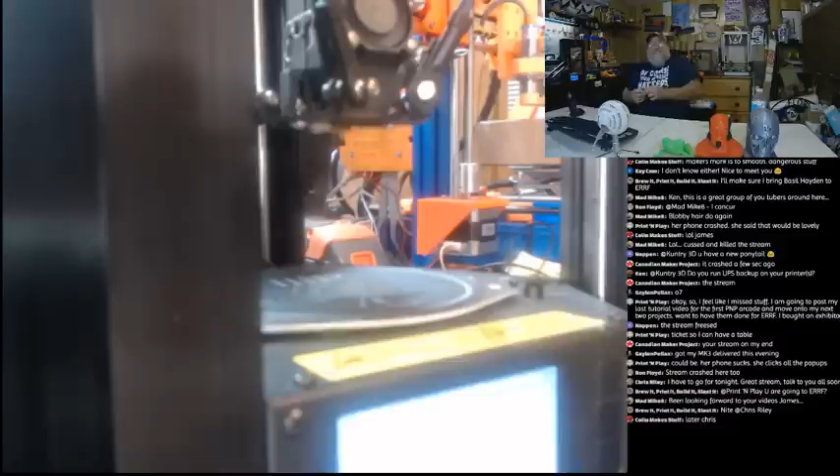Oh God, I crack myself up sometimes.

Hit me up about that stream though, Chris, we'll get that done. It's skateboard grip tape basically for the bed material. Yeah, I know, it's a little slick for grip tape, but I get you. I ain't putting no blue tape on it, I will buy me a piece of BuildTak and stick it on there after I take that one off.

She clicks all the pop-ups.

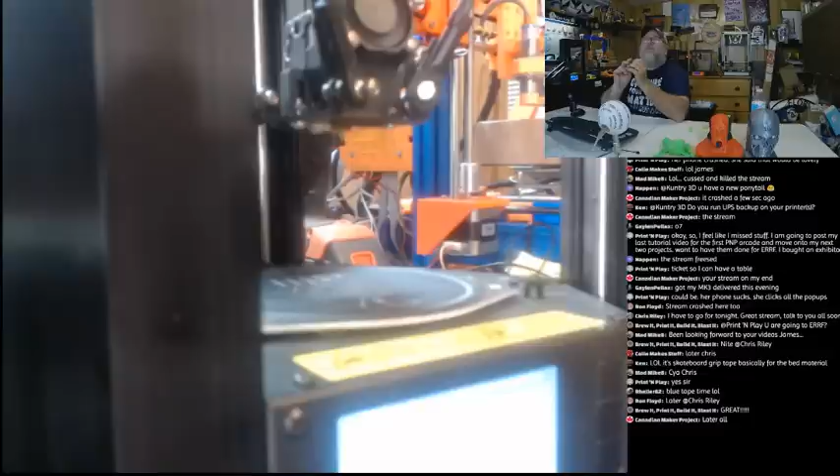And I'm fixing to call it this one too, people. It gave me some ideas on some settings to play with, and I might revisit this.

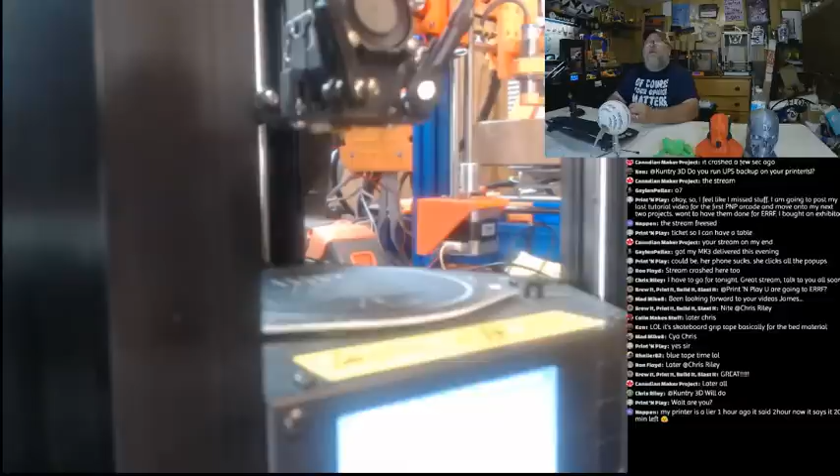All right, so now it says 20 minutes left. Well, we got 15 left on this one. We're gonna sit here and talk for 15 minutes. That'll make this a 3-hour and 30-minute stream, which is way too damn long for what it is. But what I want to do is, y'all gave me some settings to play with, so what I may do is save that for a future video where I can play with some of these settings and then come back and go, you know what, I figured it out.

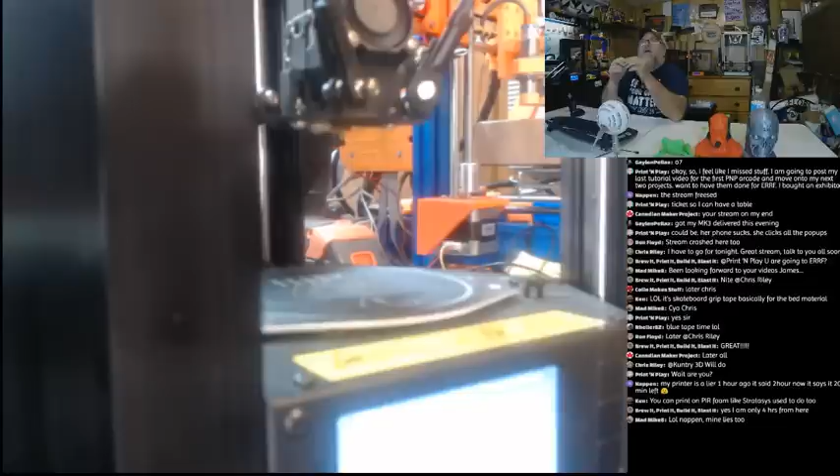Yeah, Nappen, everybody's lies, dude. There's no such thing as a good estimate on a print. What's that, you can upload it to some website and it'll tell you? I can't remember, Tom's got a video about it, or he talks about it in one of his videos or something.

Duet controllers, the time left feature is interesting. All right, well that's pretty good because, wow, you know what?

I canceled that print, y'all, can y'all see that? Y'all can't even see that, can you? I don't think I can get it back far enough to. I want y'all to look, can you see? No, you can't freaking see. God dang it, there you go. Look at that, did it cut my bed off? No, it did not. Did it cut my nozzle off? No, it did not. Oh, it's because I'm paused. Let me go over here. Cancel. Now it did.

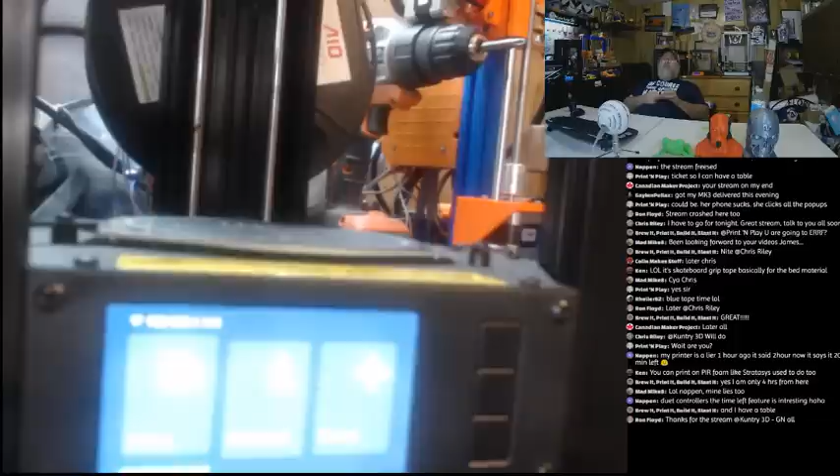I gotta catch up, I missed something somewhere. Toasty, yeah right, alright so we're gonna pull the power. Oh, and I did see on Joe Mike's stream the other night, he was talking about it sparking when you plugged it in, and I cannot for the life of me. Yeah, no, it's sparking. Well, it did the first time, it didn't the second time. But that blinking light kind of catches your eye, so you gotta be careful.

Luckily we found it was not a machine fault. Yeah right, did you Nappen? Did you really order one of these? I mean you're in Sweden, so share with us the shipping costs, if you will, because I believe when I put it in my cart to check to see it here, Joe Mike has a 1 kilovolt power supply.

Yeah, I'll have to ask Joe Mike about that. But when I put mine in the cart to see how much it was, I think it was $159, and then it was $171, I think, or something like that. So it was like $12, it was $12 or $13 shipping.

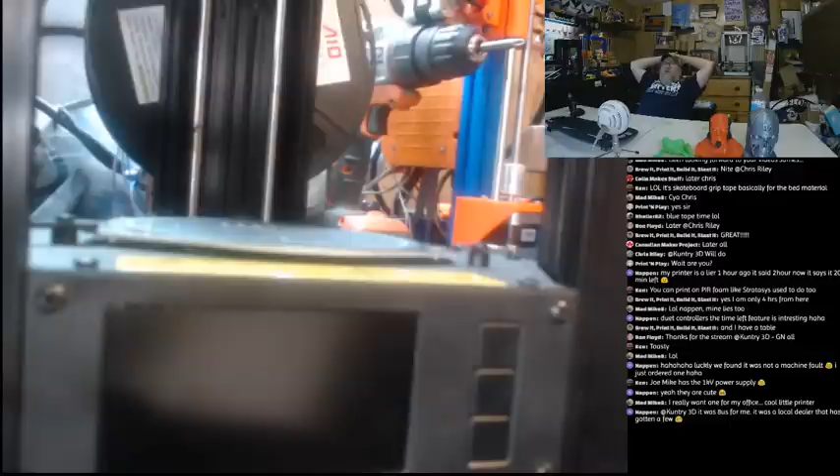So still though, it's just really I have to say, I mean, just with the little bit I've used it, it's a good little printer. It was Bus for, oh okay, I got you. No, that's cool, I get you Nappen, that's not a problem. But I have to say, for what it is, I mean, somebody was telling me they're going to go in and put TL smoothers on it and quieten it down some, and I guess you could do that.

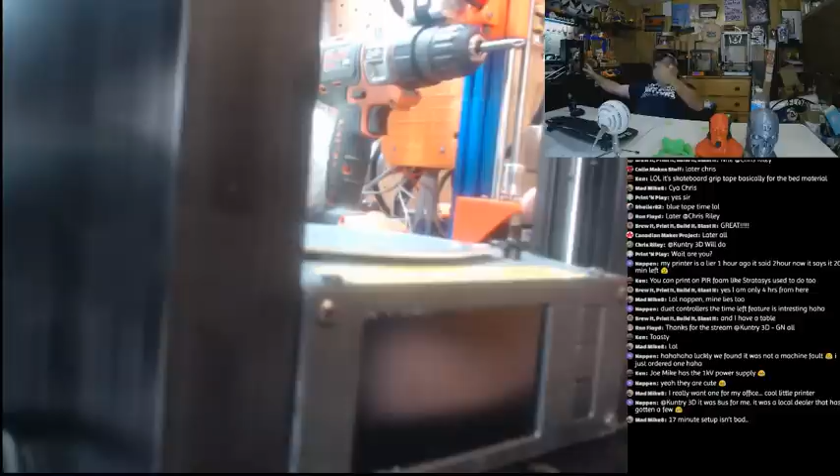For as much as I'm going to use it, I'm not ever going to do that. This printer, for me, really, somebody said take it to the office. 17-minute setup wasn't bad, but I may take it to the office to show the guys at my office, hey, this is how 3D printing works.

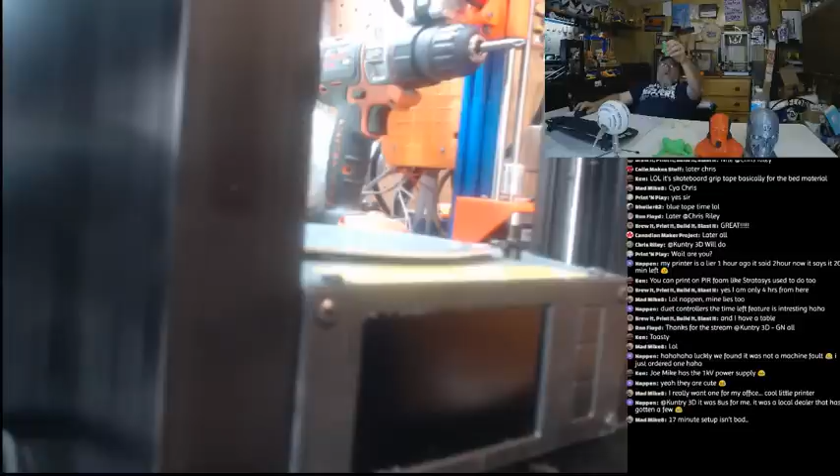Let them watch it print. Let me go back to the front camera so they get to watch it print the Queen that we did earlier. I may actually do that tomorrow. I'm scheduled to go in the office tomorrow, so I may do that. I've got a quarter of a roll of AIO filament left.

Well, and see, Ken, I don't know. I'm pretty sure that you could devise something here to quieten these down too, because they are really loud. This little printer is really loud to me.

So okay, so now we're just on the Snowball, and it's quiet in the background. So y'all tell me, what do you think of the audio quality of the Snowball? Because that I do need to know.

I'm going to finish up the last 10 minutes Nappen. I'm going to be vaping while we're talking the last 10 minutes.

But this little printer, really fast to set up. And the print quality, really and truthfully, is really good for what it is.

Okay, Mad Mike, thank you. Snowball's an awesome mic. Man, y'all are getting killed by spell check tonight. But the printer's really good for what it is. It's tiny, and I mean it's really tiny. You really, when you get it, and yes, I do, Ken. It's right here. I do.